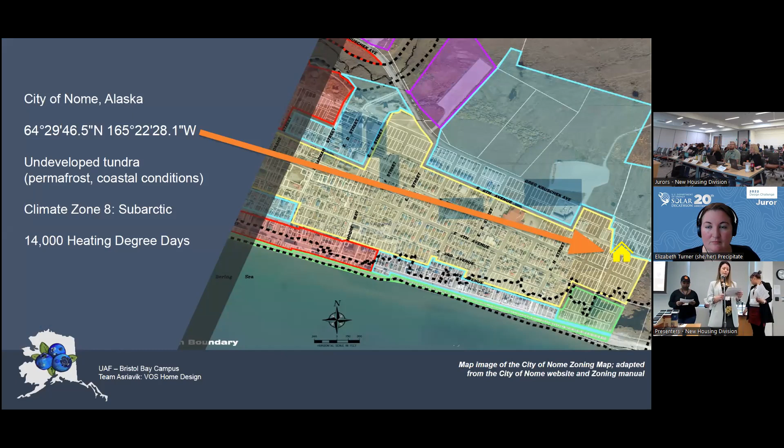Our home must last for generations, so it's designed to be resilient throughout a changing climate. Our goals are to make this home multi-generational, energy efficient, emergency secure, and replicable. These 4 goals guided us through our design process and helped us address all contest components of this decathlon, which are interwoven throughout our design and in this presentation.

Multi-generational living is addressed with a universal building design that considers family members from birth to elder, and incorporates design modifications with accessibility in mind.

The VOS home is a 2-story structure with a single slope roof, which uses a hybrid construction of 4 40-foot shipping containers and traditional timber, built to withstand extreme temperatures, up to 75 miles per hour high winds, and heavy snowfall. We incorporated creative solutions made specifically for our target market and a subsistence lifestyle, such as unconditioned spaces for food storage and game processing.

Our design is tied to a culture of people, not one specific family. We are considering the comfort of the client beyond structural integrity. Customization and cultural empathy can often be neglected in traditional building design, making homes a cost detriment due to their inability to be habitable long-term.

Air quality in the home is addressed with a comprehensive HVAC system that combines two modern mini-split heat pumps and a heat recovery ventilator, or HRV. This system warms and conditions the inside home air and ensures that fresh air is constantly circulated back into the home. Additionally, the HRV system also removes pollutants from the air and recovers heat loss during the ventilation process. Air is expelled from the home through bathroom and kitchen vents, which also controls moisture levels in these damper areas.

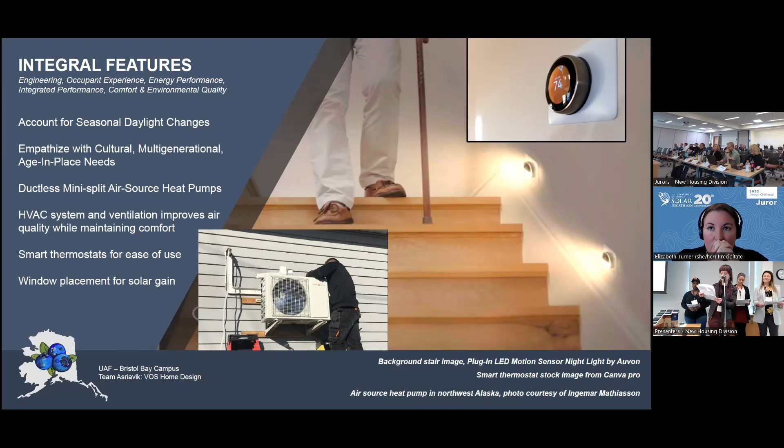Integrative passive design strategies work to minimize heating needs with optimized renewable energy systems to address occupant load profiles. Innovative lighting technologies and window placement will maximize solar gains, while timers and occupancy sensors help to mimic daylight in darker winter months.

Energy costs in rural Alaska create financial hardship and design constraints. Reducing demand through efficiency measures and utilizing solar PV minimizes the operational costs. An average home in Nome can cost between $1,400 and $1,800 in electricity per year, adding heating fuel from $300 to $500 per month, depending on the season. Our design projects a yearly energy cost of just $240, which eliminates the heating fuel altogether.

We used Ekotrope software to model our design. Before adding renewables, our HERS rating was 17, and after adding a solar array, it dropped down to -3. Components that contribute to our better than net zero rating include extreme insulation, triple pane windows, programmable thermostats, building orientation, smart outlets, minimal plug loads, and our 15 kW solar and battery system.

Modeling energy performance, we found we had to create many custom components for things like the special envelope construction, high performance windows, heat pumps, and a heat pump water heater.

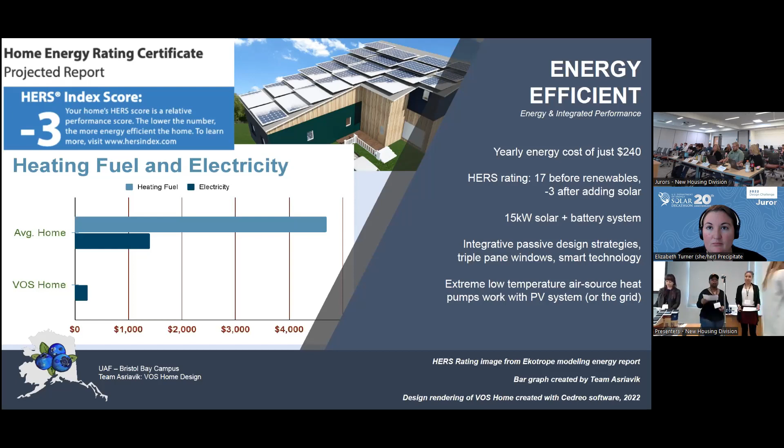Withstanding the climate crisis is imperative to encompassing a multi-generational building lifespan. Alaska's extreme weather changes are being monitored and include rising sea levels due to glacial shed, heat fluctuations, and abnormal amounts of snow. To ensure the home's longevity, the design incorporates a post and beam foundation to allow for moving of the home in the event of flooding.

A tight building envelope allows for heat retention and a stable indoor temperature regardless of access to electricity or heating sources. Additional emergency conscious design considerations include north-south facing egress windows, a hidden first story safe room accessible through the master bedroom closet, and an emergency fire exit with a drop-down ladder on the second floor.

Backup power sources are essential due to the frequency of power outages during winter months, which is why we have a backup battery system to power essential loads, as well as a small wood stove for emergency heat.

The VOS home serves as a guiding framework for other cold climate locations. The ability to modify and customize a building design, decrease the embodied environmental impact, and move toward the future of renewable energy can be achieved in an effective manner. Engineering details of this replicable design are specific to our region.

This begins with the bottom of the house elevated above a gravel pad using geotextile fabric to address area permafrost. The home will utilize an efficient heating system, high performance envelope with R61 walls, and WaterSense plumbing throughout to save water. While our target market is based on our potential client, the Village of Solomon, issues like a lack of affordable housing and overcrowding are found in many other regions.

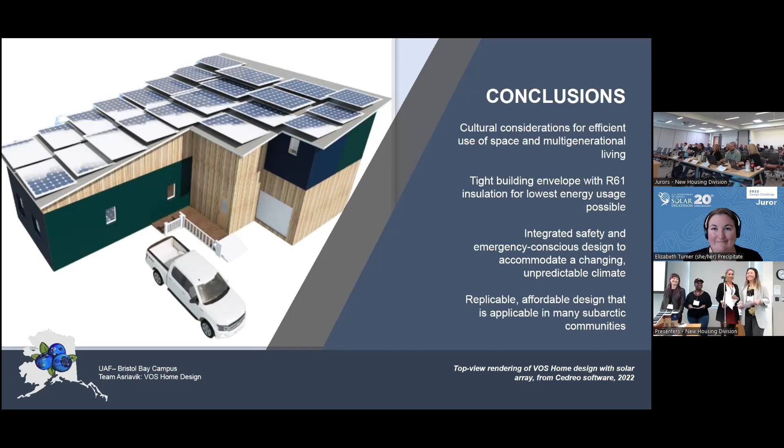And, oh, sorry, just kidding.

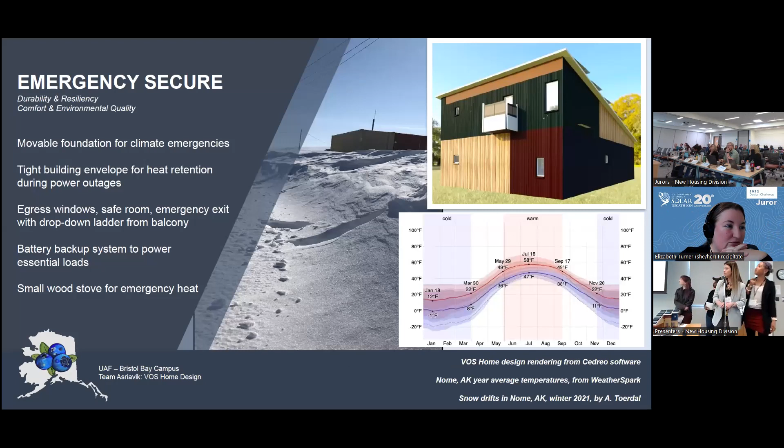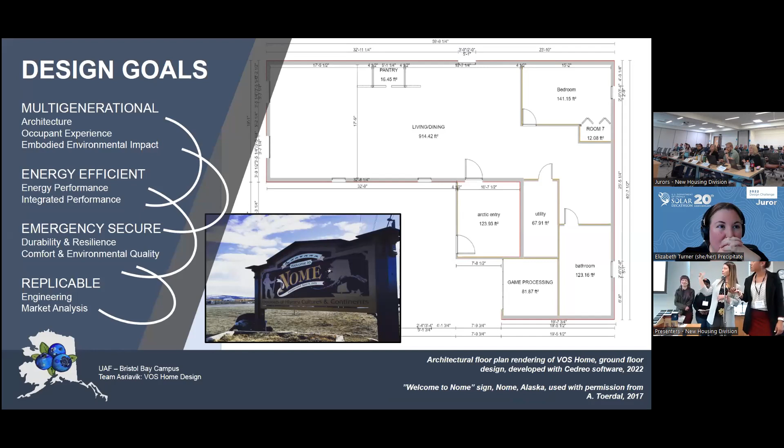We have the two 40-foot shipping containers on the lower floor, and they're high cubes, so they're a little taller than standard 8-foot shipping containers. Although the rendering shows them set next to each other, we're actually going to be cutting out the center sections and welding them together. The vertical trusses on the outside of the home will support the entire structure, in addition to the steel, which is pretty supportive of the home.

So just welding them together, you don't need additional steel reinforcement? That's a great question, I'm curious, I don't have an answer. I don't believe we will, but I think maybe we might have to add a little above to carry some load - that's a question for a welder. One thing to consider is instead of carrying the load all the way across that 40-foot length, you could turn it 90 degrees perpendicular and carry it across the internal insulation wall so you didn't have that large span. That can get really expensive, but there are different ways of dealing with it in your configuration. Also, since you have a roof above it, it's not serving as a roof, so you could just use it for the walls and get rid of the roof. I think you have a lot of flexibility and things to consider there.

So I'm curious, how do you integrate a window in the wall?

With a really, really thick windowsill. Our windows are on the outside of the home, so the windowsills are really thick. They tested putting them a little back before, and it's bad because it just fills up with snow, so that'll be added. It's on the exterior. We also want to note, since you commented about the windowsills, we made them deep because of storage - people can use them for pickling, and that's additional cold storage, which is good for winter.

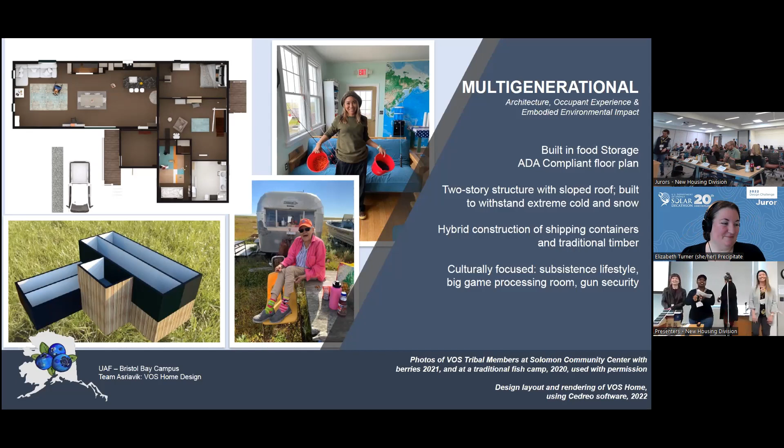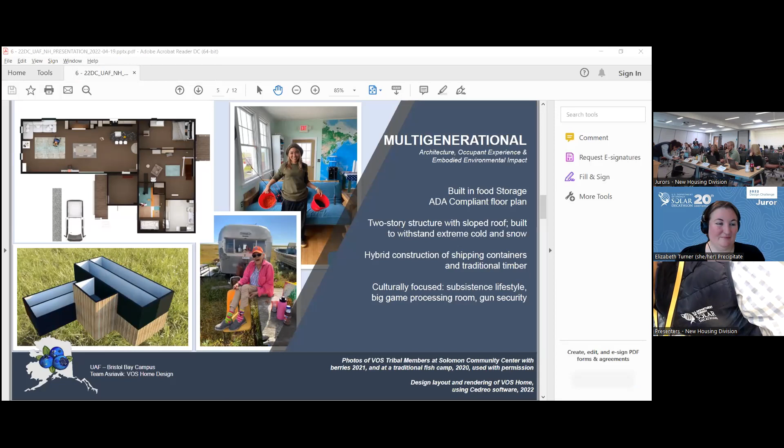Wanted to say the artist is, I believe, Yvette Reyes, who drew our team picture. It's just fun - we hadn't come together before this, so we had to get an artist. We all did it remotely. And she is an Indigenous artist, and that was very important for us to support an Indigenous artist through this as well. That's super cool.

Howdy, Ferris State. We gotta wait 5 minutes to allow y'all to start. I know, it's gonna drive you crazy. Do some jumping jacks, or tell us, do you have an energy related joke? That's what we need. Unfortunately not. You have a water fowl joke? No, I don't. Why did the solar panel forget to take out the trash? Because he has no energy at night. Elizabeth liked it - that was great. I feel that one very deeply.

Y'all have any fun plans while you're out in Colorado? I think we're gonna go downtown Golden. Go to Woody's, hit the pizza buffet - my alma mater, it's really good, write that down. Do not go to Coors. Try to make it up to Red Rocks - that's what I've been encouraging people, it's definitely worth seeing if you can get up there. But Woody's, yes, be prepared, they have really good Bloody Marys. Gotta come back next year.

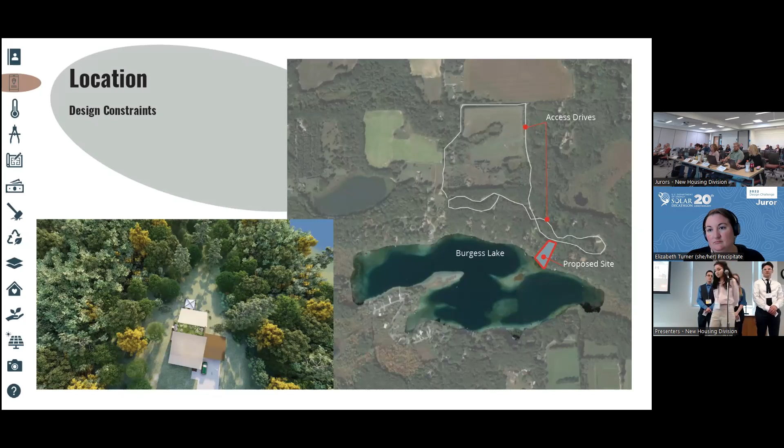Montcalm County is defined by the IECC 2015 Climate Zone 5, subtype A. Greenville, Michigan has a primarily cold climate similar to that of Denmark, which was the inspiration for our concept, Hygge.

Hygge is the Danish concept that refers to finding comfort in the simple things of life, such as a cozy atmosphere and spending time with loved ones.

Due to the nature of our project and the Danish heritage found within Greenville, Michigan, our project encapsulates the concept of Hygge. The Livsstil house encapsulates surroundings, suburbia, and society, and the existing site encourages outdoor activity and a respect for nature.

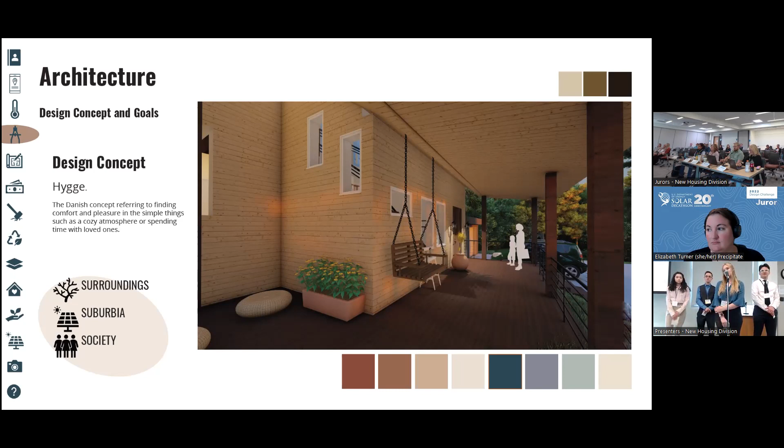We chose a suburban site for a new housing development, hoping to show how the boundaries of sustainable design can be stretched and inspire a shift in residential design thinking. The Livsstil home responds to social sustainability through the incorporation of Danish culture.

When designing the building systems and thermal envelope for the Livsstil house, we made sure to accommodate the context that the building would be placed within, as well as our goals for the experiences we wanted to bring to life within the design.

Our target occupants are the average upper middle class family found in Greenville, with 2 parents and 3 children, and an average income of approximately $85,000 per year.

After a down payment of $50,000, a 30-year mortgage will be established at 5.35% interest, which will bring the total mortgage to $449,437.

The monthly house payments, which will account for property tax and home insurance, will come out to $1,930.66, which is within reasonable amounts for our target occupants and will be further offset by the reduction of and elimination of energy and utility bills.

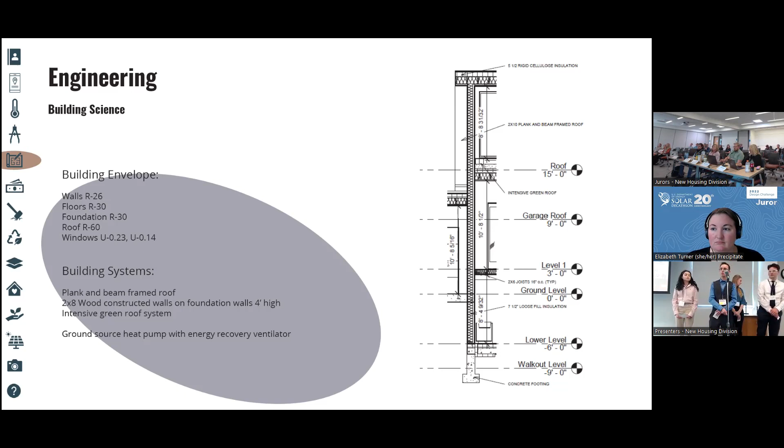The cold winds and heavy precipitation in Michigan require that the exterior and interior materials are designed to be durable and long lasting.

We determined that the Livsstil house would be designed to last for 100 years. In doing this, we had to ensure that the materials were, A, environmentally friendly with a low environmental impact, and B, durable and resilient.

Our team chose materials that were produced sustainably with the location, material source, and distribution centers in mind. The location of the home site in the city of Greenville offers a wide variety of choices in terms of materials and resources.

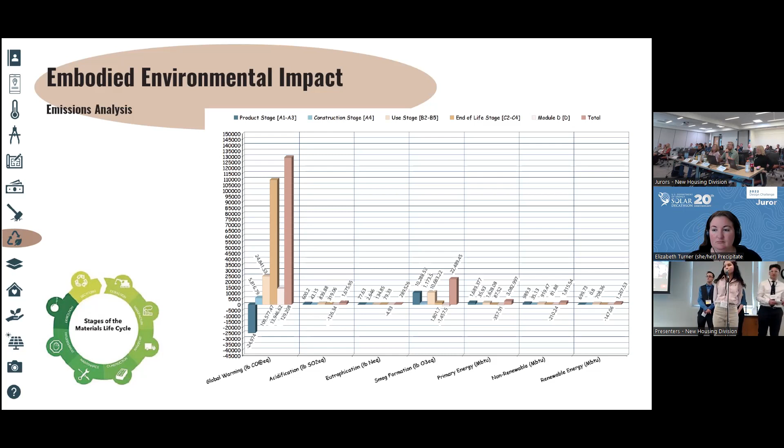The use of local and sustainable materials will be used to introduce the design to the community through the use of local labor. In addition to embodied energy, several other measures of environmental impact must be measured, including global warming potential, acidification, eutrophication, and smog formation.

An effective envelope helps lighten the loads of the HVAC system, and the building form allows the HVAC and ductwork systems to function properly throughout the home. The slope and orientation of the site have an impact on building performance in terms of passive strategies.

Glazing allows for direct solar heat gain to warm the spaces in the cool winter months, while triple glazing and roof overhangs help prevent excessive heat gain and heat loss. The roof orientation allows for the placement of photovoltaic solar panels, and a rainwater collection system purifies and circulates water back into the home's plumbing system.

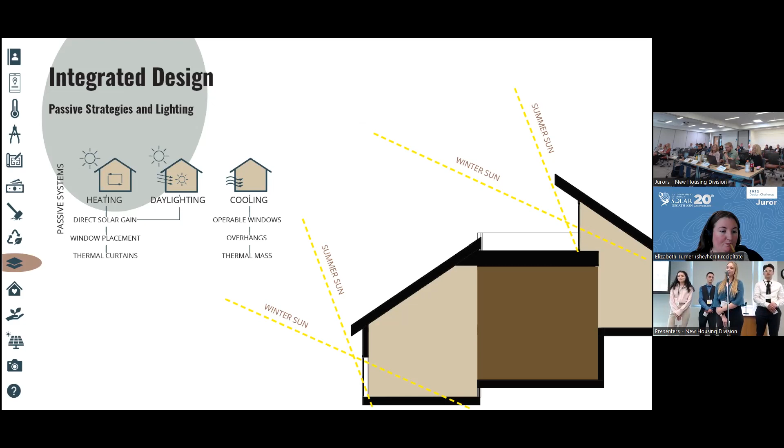The Livsstil home was designed for a single-family household to bring them closer together. The first level is an open concept design to promote conversation within the family and their guests. Sometimes comfort comes from being alone though, so there are areas throughout the home to provide just that to the individual.

A smart home system is embedded into the infrastructure. This design ensures that every other system works efficiently, saves money, and provides safety to the family.

All appliances are going to be electronic, stainless steel, have an Energy Star rating, and manufactured by LG for optimal connectivity throughout the home.

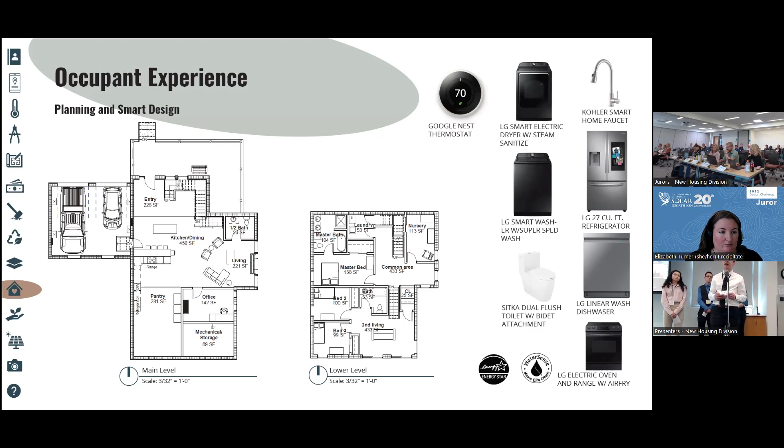The HVAC system, a ground source heat pump with energy recovery ventilator, was selected with occupants' comfort and system efficiency in mind. This utilizes a vertical closed loop system in order to maintain the existing trees on the site. Mechanical selections and load calculations were performed by our HVAC student partner.

Using passive design strategies as well as efficient selections for the thermal envelope, appliances, and internal fixtures allowed us to create a house that is more efficient than the average residential project in the United States, achieving a HERS score of 38 without renewable energy.

With help from our design partners, Michigan Solar Solutions, we were able to develop a solar array capable of supporting the energy needs of the house, as well as providing energy to power an electric vehicle. With the incorporation of renewable energy into our project, we were able to achieve a HERS rating of -9.

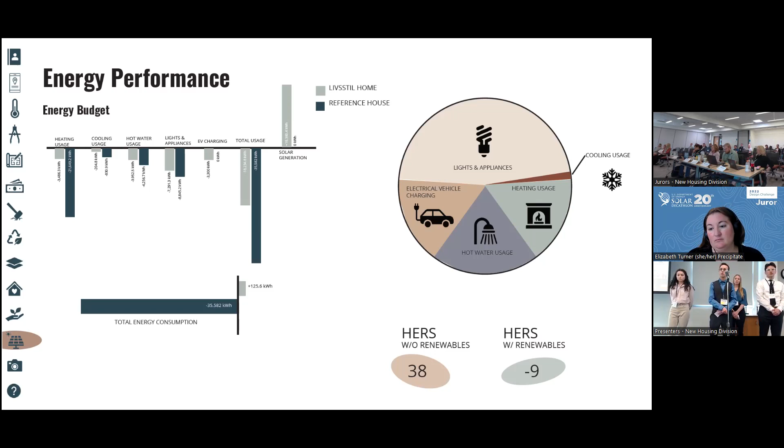By calculating the estimated cost of electricity for the area based on the needs of our project, we determined that the occupants will be saving $389.91 per month, which will account for the cost of purchase and installation of the solar grid in just under 3 years.

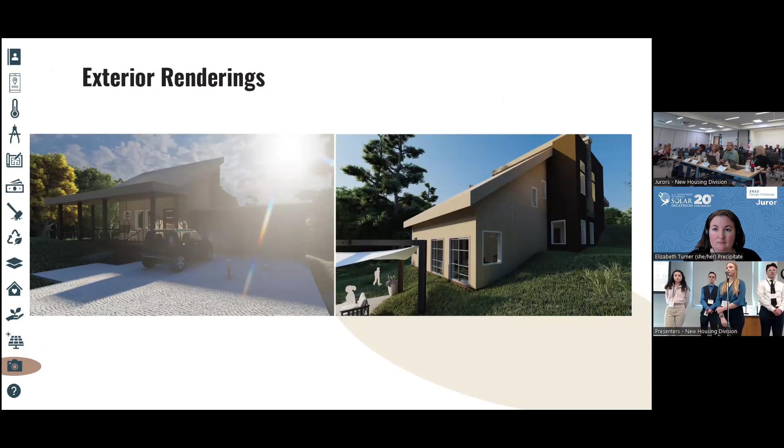The Livsstil home utilizes the slope and an open concept floor plan to create a dynamic and functional design. The 3D form was topped with a large gable roof that resembles those of Danish architecture. This roof structure was subtracted from to create the 2 large shed roofs with a green roof in between.

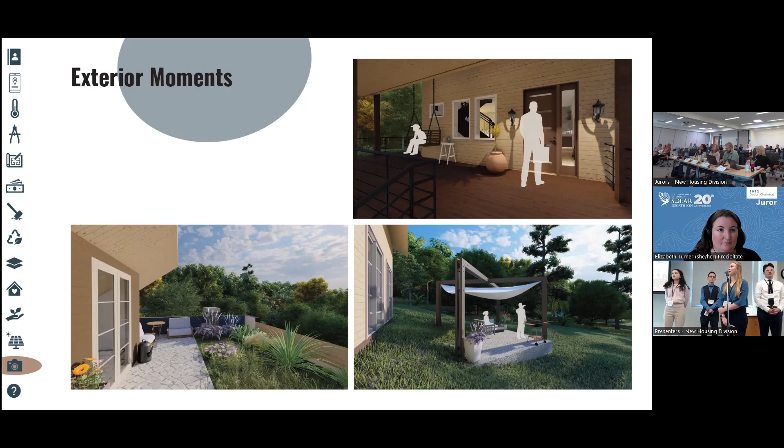We included outdoor experiences to encourage an interaction with the site, and the exterior colors allowed the building to become a backdrop for the site and the blue of the lake. The Scandinavian color palette creates a contemporary, soft and cozy atmosphere within the home, and the wood and warm neutrals blend with the site and the incorporated greenery.

In learning from hygge, we can create a future where sustainable living is not only ideal, but standard practice.

That was perfect. Cut you off there, yeah, that was perfect. Great, let's have a round of applause for our team.

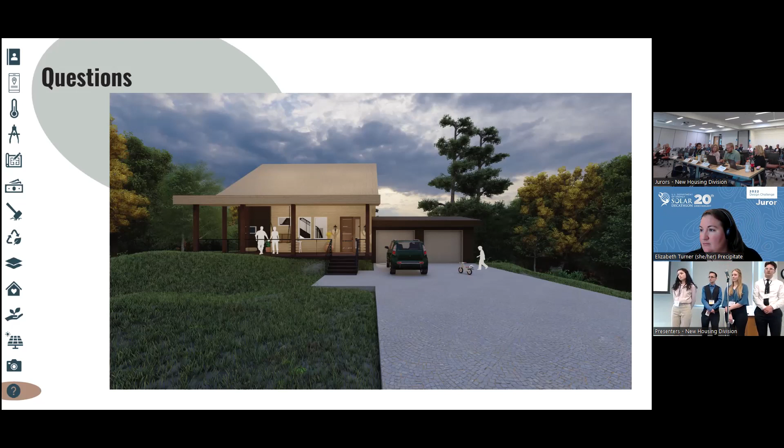The other question I had, if you go back one slide, lower right, what type of doors are those? Are they sliders? Yeah, they're sliding patio doors. The grid pattern on them made them look like they could possibly be garage doors, and while that is modern and I'm seeing it a lot in homes, they're very uncomfortable, very difficult to air seal, and they will kill energy consumption in a home, so I was just curious. Thank you. The doors we selected are from Endure, they're patio doors, and they are fiberglass insulated glass doors.

So I love the porch, by the way, I'm a big porch person, so I'm glad you added that. But I did have, you had a statement in the submission that said wrapped to correct tightness to achieve ACH3. Do you have any detail around that you could share? We don't have specific details, but we designed the building and envelope to meet Michigan code requirements, which are an ACH of 3. Okay, yeah, just in general it's hard, it's not necessarily easy to do. The integration of the components together is so critical to make sure you're not getting air leakage, so it's good to see the details around how you're going to achieve the air tightness, because you can do air sealing from the exterior and interior, or some blend of both to achieve that. Trust me, builders are trying to do it all over the country, and it's not as easy as it seems.

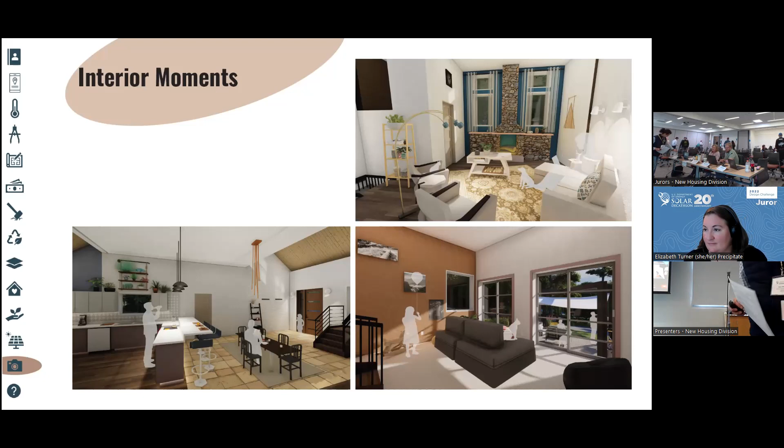Okay, I believe now we have a break scheduled, up until we'll meet back here at 35 minutes after the hour, for our University of Victoria, British Columbia team. The next two are online. No, they're on site. Okay. Yeah, wow, great. And then we got 2 online after that, I think it's Australia and... yeah. I am, I just don't want people seeing me eat. Oh no, you're dark, fine, screen.

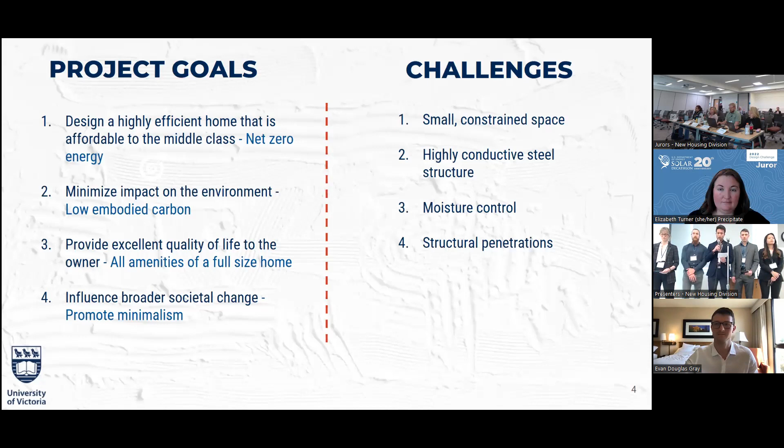We have south-facing fenestration with overhangs to help optimize seasonal exposure to sunlight. The roof pitch was designed to be 36 degrees, the optimum angle for PV generation at the site location in Victoria. We also included a simple rainwater collection system to provide purified drinking water, with a storage tank located in the roof.

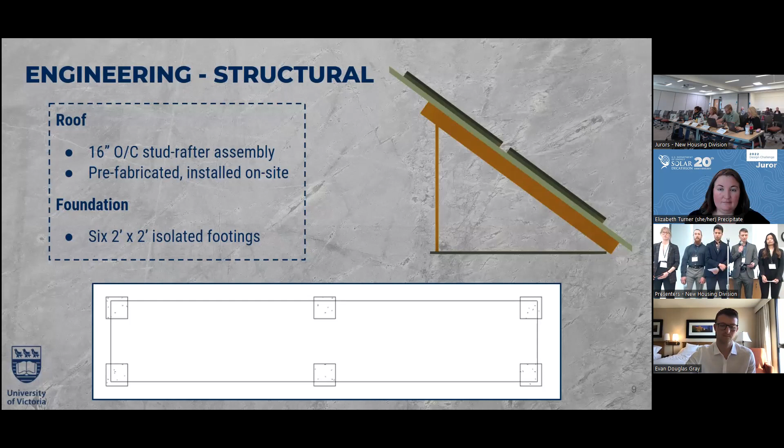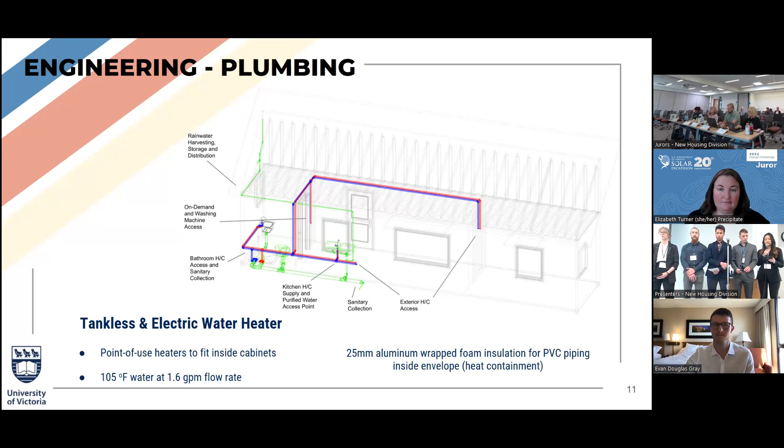Next slide, here you are looking at the plumbing layout. The piping design would minimize maintenance needs and heat loss. Along the pipes, we decided to install tankless electric water heaters due to their efficiency and the space constraints.

As I mentioned earlier, our project is built out of a repurposed shipping container. The corten steel material withstands extreme weather and is incredibly durable. To ensure optimal temperature within the unit at all times, a heat pump is paired with a passive heating design. To improve resilience, a rainwater collection system was added and is purified on site.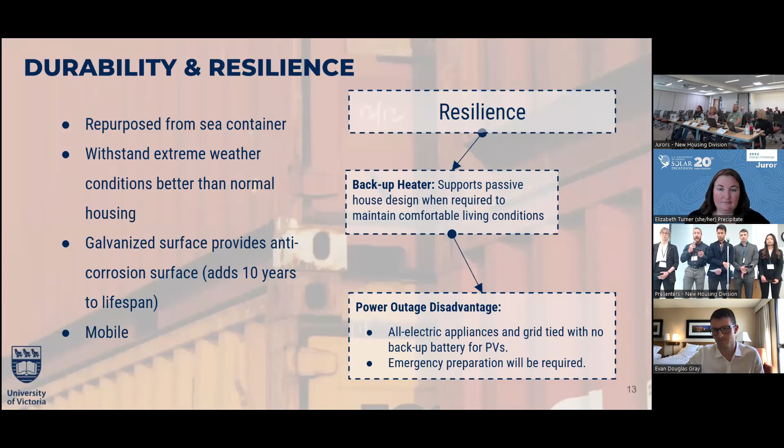A life cycle assessment was done using Tally. The most important point we can see here is the global warming potential of 5,085 kilograms of CO2 equivalent. The embodied carbon was around 170 kilograms of CO2 equivalent per meter squared, which is 24 kilograms of CO2 equivalent per meter squared less than the average passive house Part 9 building.

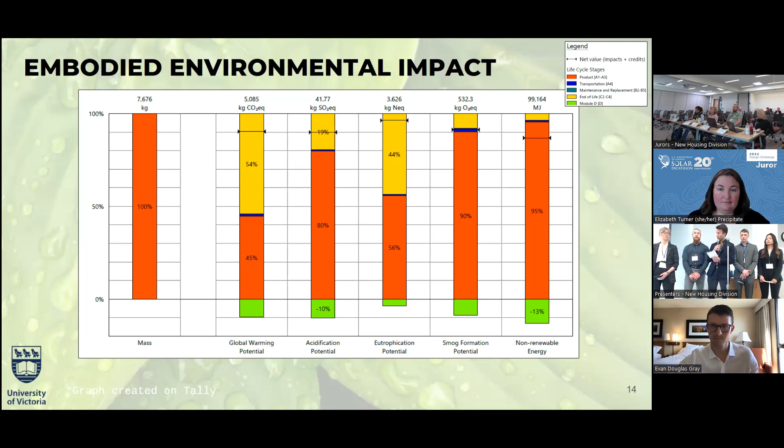Most of our carbon emissions came from production and end of life cycle. Transportation was kept at a minimum by using locally sourced material, and the green bar there indicates that 10% of our building can be reused and recycled.

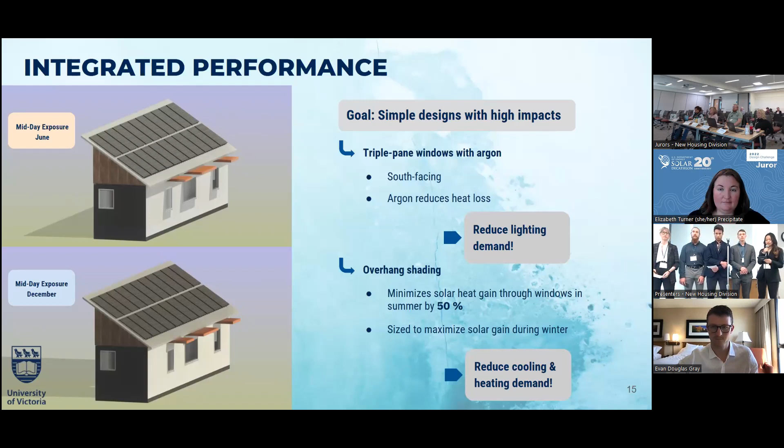Now I discuss how we use simple architectural designs to increase our energy performance. As you can see, we added windows on the south side of the building for daytime lighting. For the material, we used triple pane glass filled with argon for increased insulation. On top of that, we added overhangs sized to optimize solar heat gain during winter months and shading during summer months.

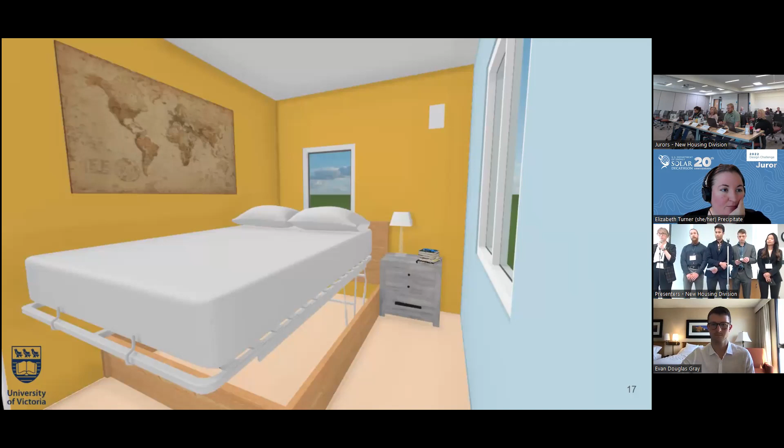For comfort and environmental quality, we used low odor adhesive that's safe for indoor use for the walls. We ensured indoor air quality and particulate control with a comprehensive ventilation system in the unit. We also provided the occupant with a robust temperature control system, as well as a full suite of home amenities.

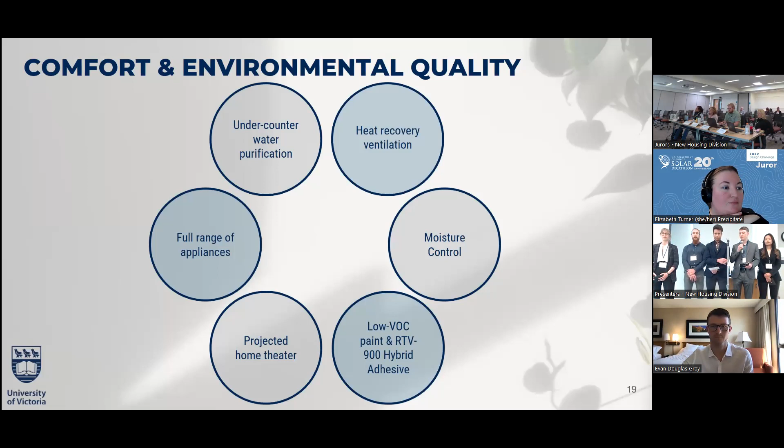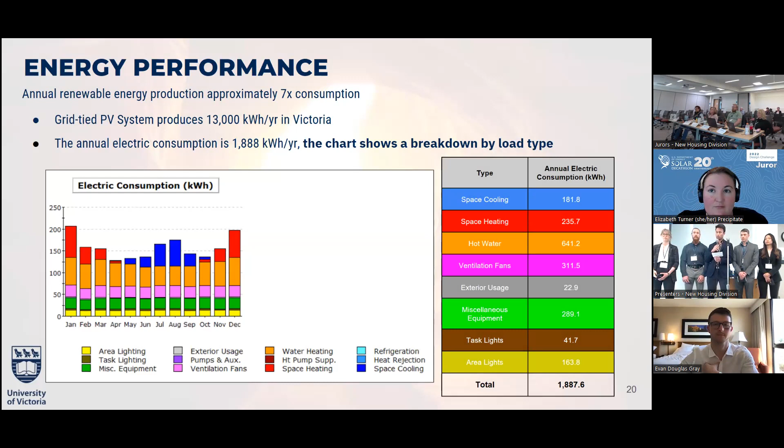For the energy analysis, the CCAN's grid-tied PV produced 13,000 kilowatt hours annually, which is 7 times the consumption. The chart is broken down based on load type, and hot water was the main contributor to the electric consumption. An important thing to note is the mechanical energy use intensity, which includes all the loads except lighting and miscellaneous loads, found to be 46.2 kilowatt hours per meter squared. This meets passive house levels of performance by the 2018 BC Building Code. Thank you very much for your attention, and welcome your questions.

My question is, are you a power producer first and a home second, or a home first and a power producer second? For sure, for sure, of course.

When we were starting out with our design, a really big concern was that we weren't going to be able to have enough insulation to have a low heating need. So we made it super energy efficient. And then we kind of ended up being like, maybe we didn't need to make it that energy efficient, you know what I mean? Or we could have had less solar panels. We kind of didn't get those numbers until the very end, and then we're like, wow, that's probably way more than we need. But what's wrong with generating more power, I guess, right?

It definitely is a lot more power than we use, up to 7 times. But the planning and design considerations were geared towards generation of funding from the net metering program within our hydro system. Each kilowatt hour in excess over a year period is sold back to the local utility grid at, in ours, 11 cents per kilowatt hour. So over a year it's roughly around 1,000, depending on the degradation of the panels, as Connor mentioned. The nice thing is it definitely subsidizes the initial costs of the unit, and gives the occupant freedom of energy use, because they know they're not going to be paying for any of it, just eating into their profits on a yearly basis.

One thing to think about is if you did a thermal model and looked at where the heat loss was happening, there's probably not a lot of benefit to having anything inside the little bump outs, because you're going to lose heat from where it bumps in, right? Does that make sense? I wish I could draw this. You mean the corrugation, of the container? Yeah, the corrugation. So I think you'd be fine just having, I don't think you're gaining a lot for the cost of putting insulation in there. But you could, if you were spraying on the mycelium and let it grow, it could end up being kind of like this curvy interior wall surface

that you drywall in front of. So I really like that idea. And I think the insulation design was something we did earlier on, and now that we've had our whole energy analysis results, which is very near the end of the project, we could rethink the insulation concept and maybe not go for such high R value or air tightness, and bump that down. I think that could be a small change. I'm really big on eating your vegetables first, doing the insulation and the air sealing, so don't back off on that part.

Why 2 HRVs and 2 hot water heaters for 320 square feet?

So for the HRVs, we decided they were 2 ductless HRVs. They were quite small, so we put one in the bedroom and one in the living area, just to have ventilation to get the required CFM for the space, since they were quite small.

We were looking at different options for hot water. First of all, we only have electricity for utility, and for storage we're very limited on space. So we decided to use point of use water heaters, because the water comes on demand, and the expected use from this unit is only 1 bathroom and a dishwasher, so not very much use in terms of hot water. We decided it was the efficient way for this design. The idea of having 2 was one for the bathroom and one for the kitchen, but I think we probably could have just used one as well. Would have been fine.

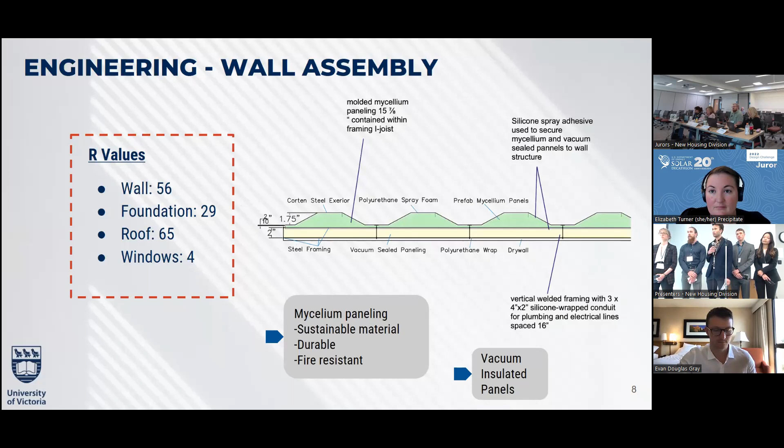And I think the one question I have, looking at your layout and floor plan, do you have any concerns about the entry coming basically into the kitchen? I know how clean I keep my space, and in a small space like this, any sort of clutter is going to be really prominent. So having that entry right into a main spot could be fairly messy if you're having people over, unless you do your dishes. Just curious what you thought about that - did you think about other layouts, other designs?

So when I was looking at the floor plan, my main thing was I wanted to have the bathroom and all the plumbing in one area, and then the bedroom aside from that, and I figured the living area would be around there. So when I was looking at where to put the door, I initially had it more central on that wall, but I didn't really want to put it in the middle and waste the space, so I pushed it over to that side. I feel like I could have pushed it over to the other side a bit and had the table beside the living area. But I just wanted it to be on one side so it didn't take up too much room in the rest of the unit.

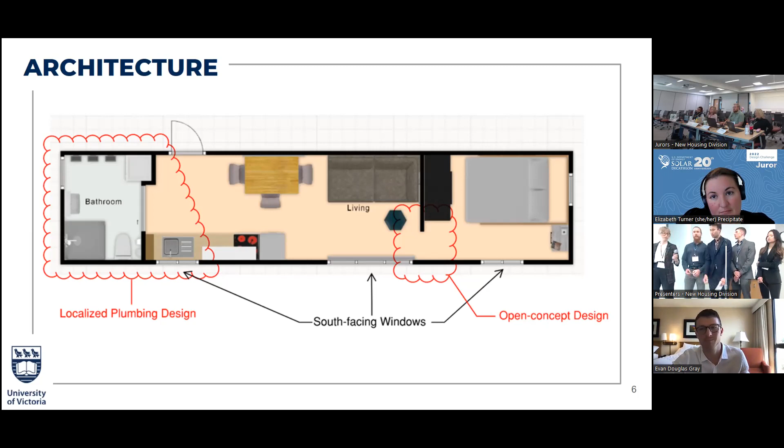Yeah, so you were talking about the heat pump? In that model, that was showing a water collection view. We took off the side paneling so you could see in there. It isn't actually a fully insulated space, because we didn't want to penetrate into the shipping container too much. So that is meant to just be essentially a rainwater collection system to provide drinking water.

And then I believe the heat pump would be mounted up there as well. Okay, now that makes sense. And I think in creating a small portable space, like if it needs to be moved.

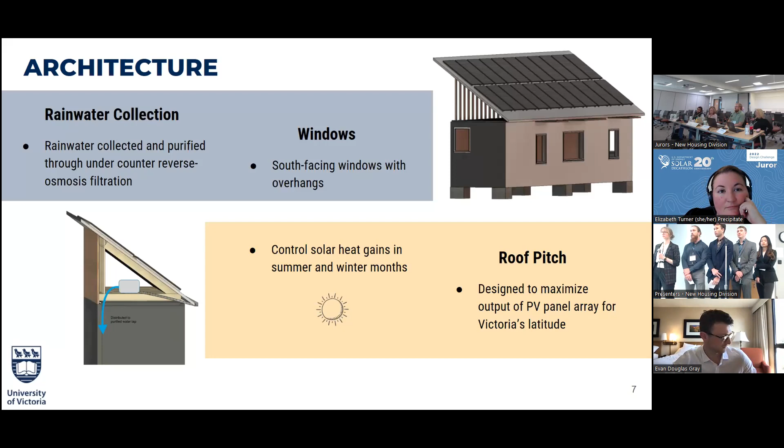I had a question also about your site. Was it just available space? So that was when we first started the project, it looked a lot different. We were going to have a design partner that's making a homeless sheltering community in this space in Victoria, so we were going to work with them. But eventually that didn't really pan out, so we moved to using shipping containers. That's where we got started.

Question time, all right, you can wrap up that final thought. Yeah, so that's where it started, and then we decided to just do our own shipping container, and we just kind of had that site. So we didn't...

Thank you so much. I really commend you guys for doing this as an extracurricular activity. That's awesome. Next year's going to be even better. I hope you have fun. Yeah, we did, great learning experience. Thank you. Good job.

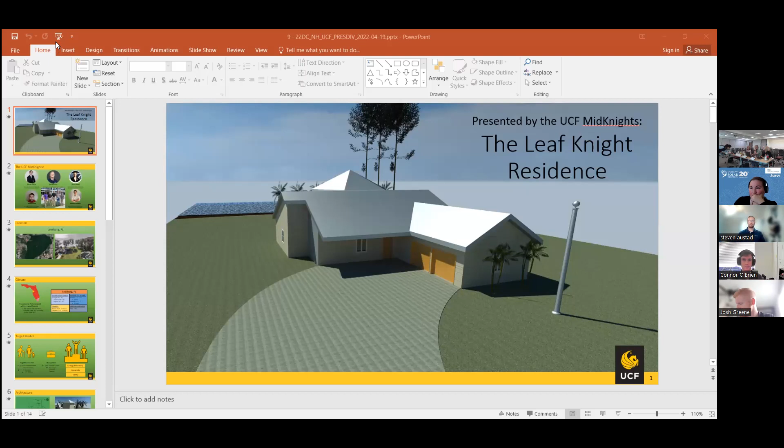Great, thanks. I can't get on the site, what's going on, get kicked out. I sometimes have to shut down Google. These are the only people that need to be hosting the computer. Clear. Well, I'm not on this, I'm just trying to get into the portal again so I can look at what I did. I'm just talking about the portal. We'll try it again, I'll try and Google. Okay, that worked, Google worked. I would have liked popcorn, but you're just fine. I just was seeing who else was in the room.

No, I've seen those states, Michigan and Wisconsin up north. They probably get a lower first score because they're so cold.

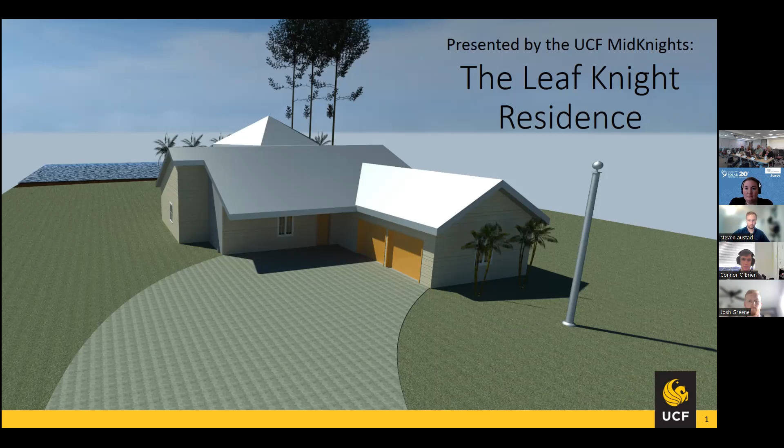Our team, the UCF MidKnights, consists of 5 senior undergraduate mechanical engineering students shown here.

With a population of approximately 24,000 people, Leesburg, Florida will be the Leaf Knight Residence's hometown. Leesburg is well connected to 2 of Florida's bustling hotspots in Orlando and Tampa, and has a charming set of attractions itself, such as Venetian Gardens and the annual Food and Wine Festival. The home will sit by a brook that empties into the nearby Lake Eustis, granting the occupants a quiet and private reprieve from the surrounding lively centers of social activity.

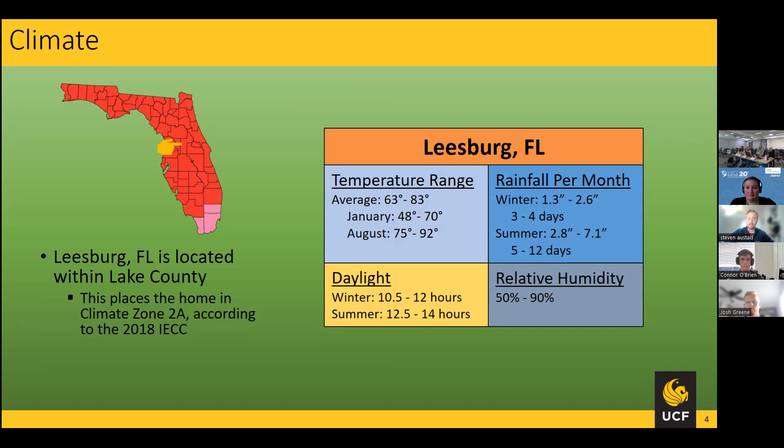Leesburg is located within Florida's Lake County, placing it in climate zone 2A, which is characterized by a hot and humid climate. Florida is one of the best examples of climate zone 2A, as it features long summers and short and mild winters. Temperatures range from 48 to 70 degrees during the coldest months, and from 75 to 92 during the hottest months. Florida is also known as the Sunshine State, which is reflected in the large number of daylight hours throughout the year.

A small family that likes subtropical nature, but still loves suburbia's modern conveniences, was the primary kind of consumer this home was designed for. Ideally, the income earners would have a high education career with an income that can safely finance the home. They would be seeking a home that soundly protects them from Florida's continuous onslaught of sun and storms throughout their lives. Reducing operating costs to maximize day to day comfort is also a big plus to the perceived consumer.

While no specific architectural style was chosen, the Leaf Knight residence was designed with the idea that it would appear hard on the outside, soft on the inside, and strong throughout the structure to make the consumer feel safe and comfortable. The floor plan seeks to maximize light and minimize heat, with the garage placed on the north of the building to minimize sun exposure for an unconditioned area. The bedrooms are on the east and west sides of the building to watch the sunrise and sunset, and the south is filled with windows to let light illuminate the common areas, easing heating loads in the winter.

The hot and humid climate of Central Florida can often lead to reduced efficiencies in the home's mechanical systems. To remedy this, we use systems that work with, instead of against, the climate. To create a comfortable environment within the home, a variable speed heat pump unit was chosen for the home's HVAC system. These units are ideal for climates like that of Central Florida, as they feature exceptional humidity control and energy efficiency by running at a reduced speed for a longer period of time. In addition, mindful placement of the compressor can further improve energy efficiency. We accomplished this by positioning the unit where it would be shaded during the hottest parts of the day.

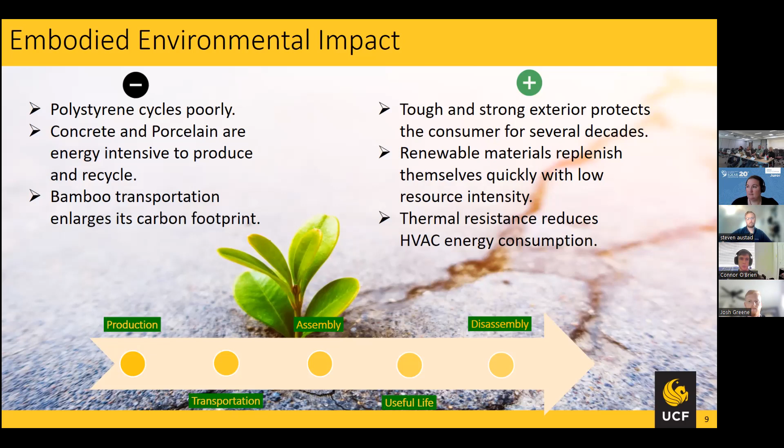One of the goals of this home was to deliver premium comfort as efficiently as possible. Passive systems, such as the Google Nest Smart Thermostat, improve the occupant experience by creating a more comfortable environment within the home. By viewing the home as a whole, we were able to make strategic decisions that would improve the occupant's living experience.

We started by selecting a lot with southern exposure, which provided the home with the ideal orientation for roof-mounted solar panels. The back of the home features a hexagonal shape with a vaulted ceiling, which accentuates natural lighting throughout the day and provides opportunities for cross ventilation and for hot air to rise via the stack effect.

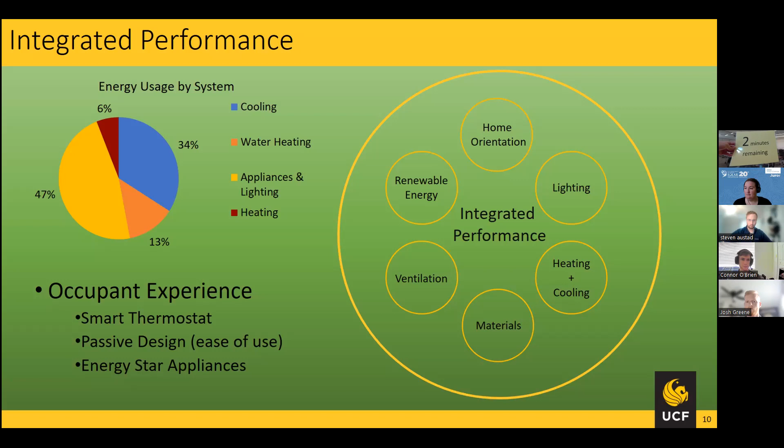Thanks, Connor. Hey everyone, I'll be going over the comfort and environmental quality of our home, in which we took extra measures to cater to.

For our HVAC system, we chose a system that can work in conjunction with a Google Nest thermostat, as well as HEPA air filtration. Additionally, our 50-gallon hybrid water heater includes 3 different modes to satisfy the occupant's needs.

The ventilation of our home features an energy recovery ventilator, a dehumidifier, and many operable windows that allow for cross ventilation when opened, like Connor mentioned.

Lastly, to further reduce the noise in our home, we chose to incorporate sound deadening materials into the interior walls and floors, helping maintain an even quieter living space.

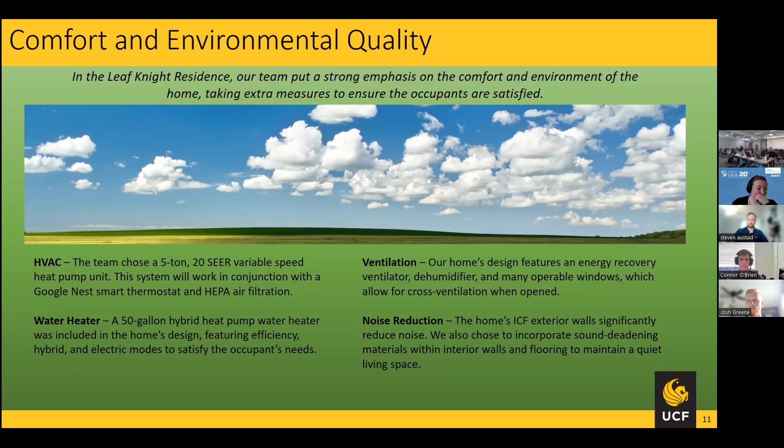The grid can produce a yearly output of around 12,660 kilowatt-hours, which more than covers our household yearly needs, as well as accomplishes our goal of contributing to the power grid.

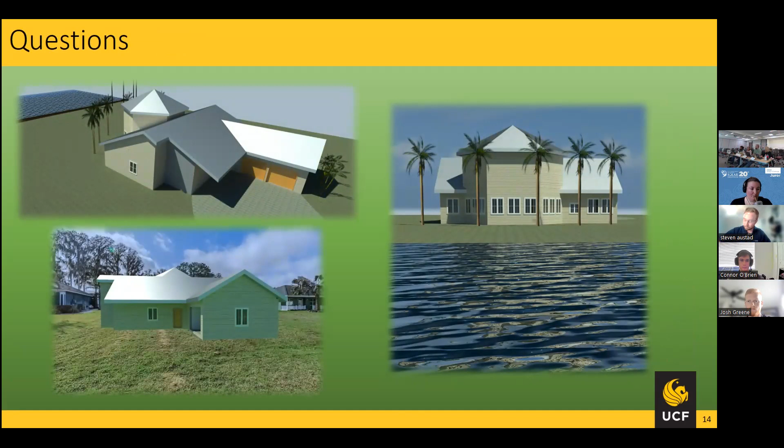Yeah, I had a few questions about your HVAC system. Could we go back to that slide that showed your, it's like the second or third slide.

Can you walk me through sizing, location, and your thoughts on implementing this? Sure. We chose a 5-ton system since our home is 2,170 square feet. We also went with a 20 SEER unit for better efficiency. We sought to place the condenser on the east side of the building, but that was too far from the air handler, so we put it on the west side, which is not as ideal. We were going to either put a tree or a small wall to shade that unit and make sure it's operating at peak efficiency.

Okay, I just wanted to make sure—I couldn't quite tell from your plan set, is that air handler out in the garage? Yes, it is. Okay—well, no, sorry, it's a small closet. I think that was a last minute change to our design on Revit. Okay, I just couldn't quite tell. Yeah, having anything in the garage like that is definitely going to be a big no-no for any program compliance. Yeah, we found that out at the very end and were like, oh, we need to make this change.

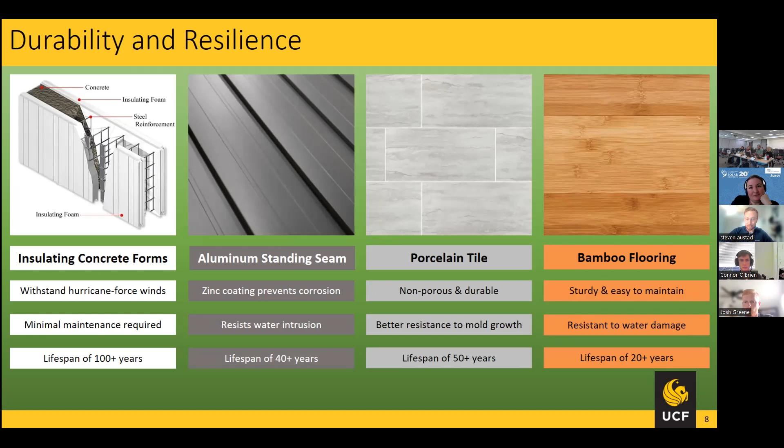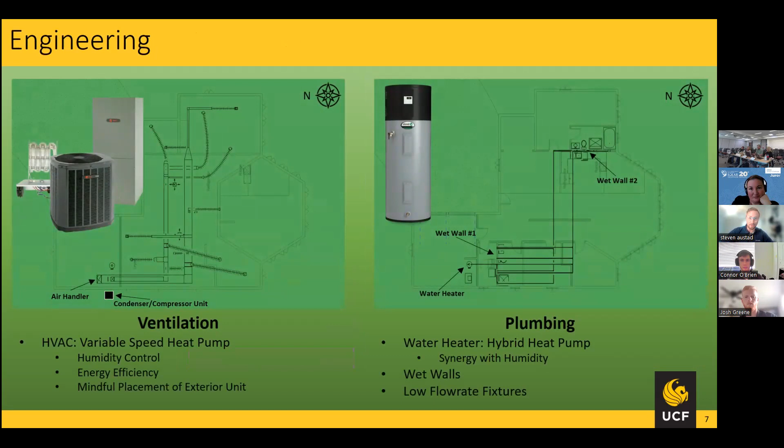I think we actually wanted to incorporate that towards the rear. We didn't think of it mostly as an energy saving space if we were going to include that, because in Florida I don't really think there's a way to get out of the heat if it's not enclosed completely thermally, I should say. But we ran out of time to add a porch, I guess you could say.

Yeah, you mentioned that you'll get solar gain in winter through the windows, but you're also going to get solar gain in summer through those windows, so you have to manage that heat gain. A lanai could provide you shading. You could still have the windows, but it would provide some shading for those. It wouldn't provide any help in winter, of course, but it could improve energy performance in the summer.

Thank you, we'll definitely take that into account. Did you do any climate modeling? This is so close to the lake. Where are you going to be in 50 years?

So I looked at flood risks, and it said there was a mild risk every 30 years or so, or roughly every time a severe hurricane comes in. One of the perks of insulating concrete form walls is they're very good against water intrusion, and a lot of our materials actually are, so ideally the home would be able to resist a flood like that, or at least with minor damage.

As for in 50 years, I'm not sure exactly if the lake will rise. Ideally that's what we're designing this house for, so we don't have to get to that point with the climate. The lake it sits on is part of a larger chain of lakes, and then backs up to a place called the Green Swamp, which is where all the excess water usually drains to, and that is much more southern in relation to the house. We would be at the northern part of the chain of lakes, Lake Eustis being the very top. That's why there's such a low risk of flooding where we are.

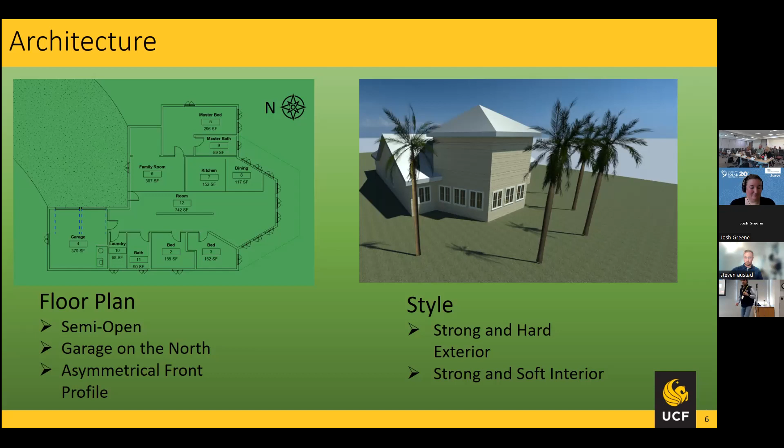Hi, can you hear us? Yes. Yes. Can you hear us? Yep. Yes, we can. Yep.

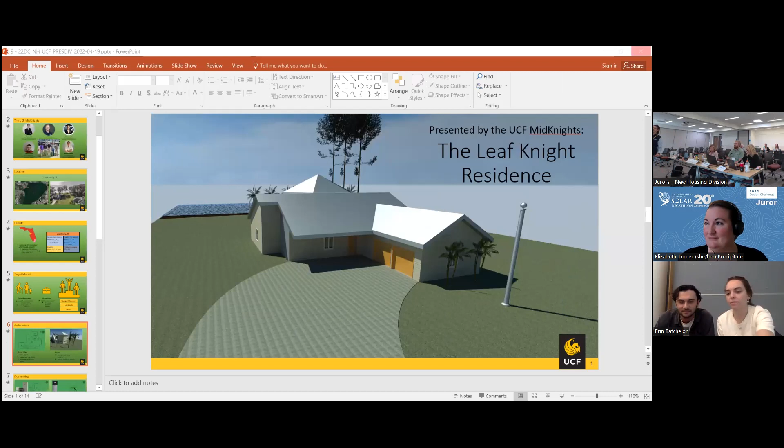Is it just you two joining us today? We have 4 of us here. There's 4 of us. Oh, awesome. Hello, we're all squishing in. Good morning or good evening in Sydney, whatever it is over there. 7 a.m. on a Sunday morning. Good morning. Thank you for joining us. Thank you for joining. Yes.

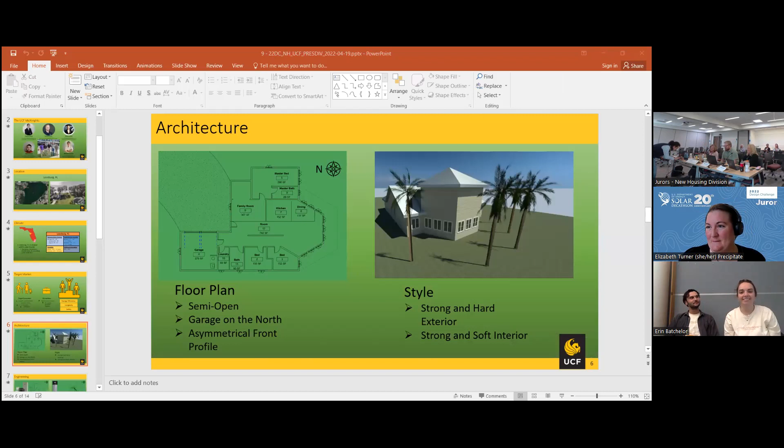Beautiful, I love the shutters. That is so cool. So I'm going to go ahead and try to give y'all control of the slides, or would you rather me advance for you?

I think we would rather be in control, if that's all right. Okay, let me see if I can give that to Erin. Thank you. Yeah.

Annie, would you mind just pressing that every time we need to change? Yeah, I don't know if it'll be able to reach. Maybe Tom, can you control this thing? Yeah, sure, yeah, I guess up to you. So basically, just when it's a new thing, it'll change.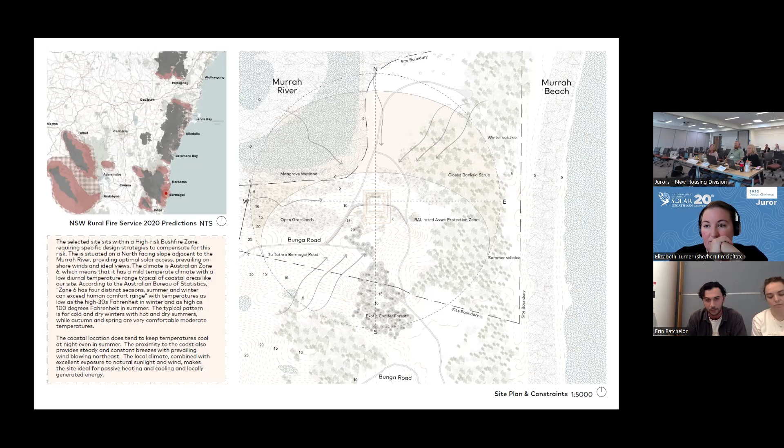Next slide please. Energy, bushfire, and passive heating and cooling independence are critical features. We define independent living to mean off the grid, but to also mean the occupants can control their own environment. 2 residential pavilions are set into the landscape, making minimal disturbance to the land and nature.

The pavilions are divided by 2 retention ponds and a connection bridge covered by a green roof. The volumes can be built at once or staged over time to make the house more affordable upfront.

The house can close up completely in the event of a bushfire. The north facade is the only exposed side of the design, with triple glazed windows that can be sealed using an operable manual folding system made of FC sheeting. This wraparound veranda is an Australian vernacular feature that allows users to completely open the house and enjoy the place around them. Next slide please.

The long section shows the open plan living space, which is typical of Australian homes, but also affords the greatest flexibility to occupants. The steel frame structure is organised on a 1200 by 2400 millimetre grid, the standard size of all sheeting in Australia. We can therefore make use of prefabricated, mass-produced products and reduce material waste.

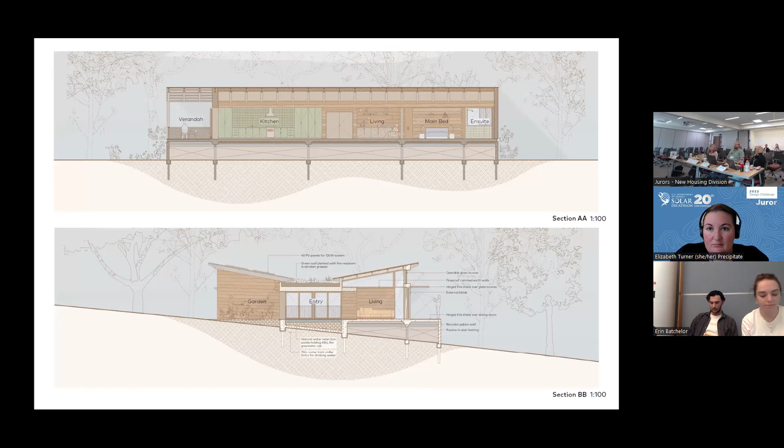Next slide please. The material selection was based primarily on fire resistance, thermal performance, local proximity, and low carbon properties. The exterior is an elegant collage of rammed earth, green coloured corrugated steel and glass, while the interiors include warm plywood ceilings, blue and green tiles, and wooden details.

Next slide. Our approach to materiality was to source recycled and locally sourced materials within a 60-minute radius in order to reduce the project's embodied carbon footprint. We selected rammed earth as a key material for its highly insulative properties, low carbon footprint and fire resistance, sourced from the excavated material on site and combined with clay deposits from the Murrah River.

Spotted gum window frames, a fire-resistant grade timber, are recycled from the nearby Bega timber yard, while all corrugated steel is also recycled from Bega scrap metal recyclers. Slabs and piles are produced from low-carbon reinforced concrete developed by UTS Engineering. All interior materials are free from toxins and chemicals, including non-VOC finishes, carpet and furniture to ensure occupant health and safety, while all appliances are electric, optimizing solar capacity and reducing bushfire hazard.

Our approach to integrated systems and engineering was to employ passive house design techniques to thermally regulate the residence. The building envelope is designed to help insulate and trap heat loads when the operable windows are closed. Earth-coupled slabs reduce heat dissipation in cooler months and capitalize on earth cooling strategies in summer. Operable metal and glass louvers are included above the 2400 millimetre datum line on the north and south envelopes, with smaller operable windows on those parallel, assisting in stack effect and cross ventilation.

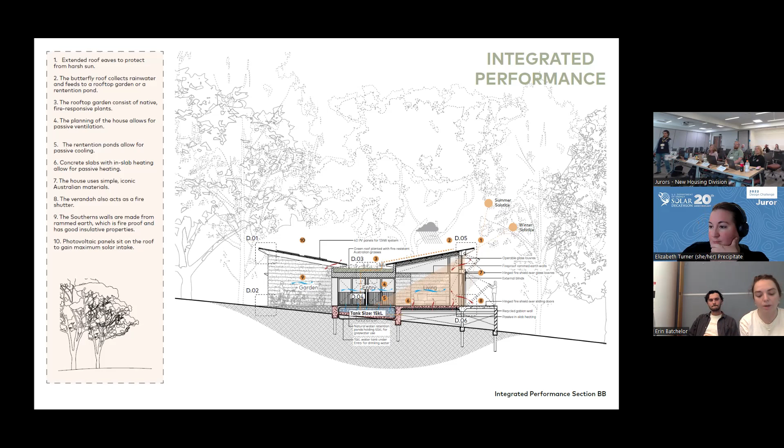The section features 2 skillion roof forms that collect yearly rainfall, draining and filtering it through a native fire-responsive green roof and into retention ponds below. This grey water is then reused for toilets, gardening, and stored for a future bushfire event. This retention pond improves the evaporative cooling properties of the design during summer. The roof on the north-facing volume opens to the sun for maximum passive solar gain, while the roof on the back volume opens to the north to allow for optimal placement of PV panels.

In order to reduce cost, our construction principles focus on simple methods and minimal finishes. Outer envelope walls are designed as sandwich panels containing a layer of rigid insulation made from recycled plastic and fastened together with non-thermally conducting fasteners to reduce thermal bridging. The roof eaves and awning overhangs have been designed to protect the northern glazing from direct summer heat while enabling the winter sun and heat to flood the interior spaces for optimal passive heating.

The spaces are designed to provide maximal function within a minimal footprint. The house uses human-controlled passive systems, allowing occupants to have control over every aspect of indoor comfort, temperature, amount of fresh air and natural light, and degree of openness to the surrounding environment. The ability to control the interior environment, coupled with the tremendous access to natural light and air, will enhance the occupants' health and well-being overall.

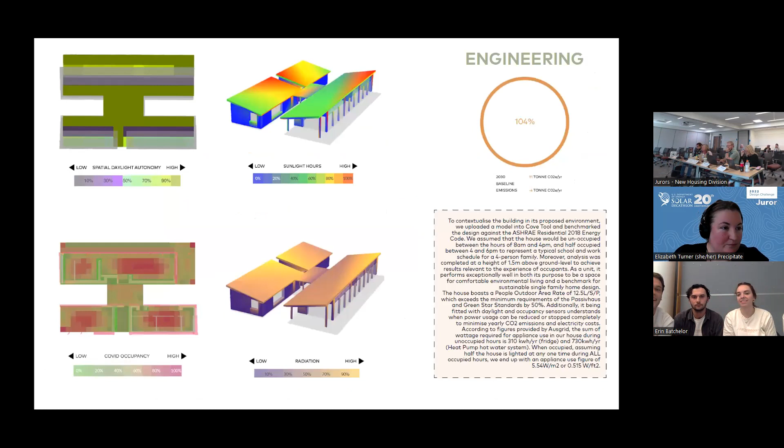I guess I've never been in one, so I don't know how bad these are. In the event of a fire, the house is designed to accommodate for that, so the panels that fold up protect the house to the best of their ability. But based on the site itself, there's not too much that can be burnt around the house, it's just in that bushfire-prone area. If it were placed in a more exposed area where there's more trees and it's more likely to catch, then more provisions could be made for bushfire prevention strategies such as sprinkler systems and gutter guards and other stuff along those lines.

So in the event of a fire, we do believe it would be successful in withstanding something like that to a very significant degree. But any damage is easily replaceable, shown by the low cost materials and the simple structure we've incorporated.

Just tacking on to Tom's answer, we designed in line with the bushfire attack level housing code, so ours is in a BAL-FZ zone, which is the highest level you can be. All gaps when the house is fully closed in the event of a bushfire are no bigger than 2 mils. We have no gutters on our house, which is the most critical point where leaves can gather and embers can catch on really quickly, and that's where the house can catch on fire. We've used non-combustible materials, so I think we would be quite successful if a bushfire was to come through, that the house would survive.

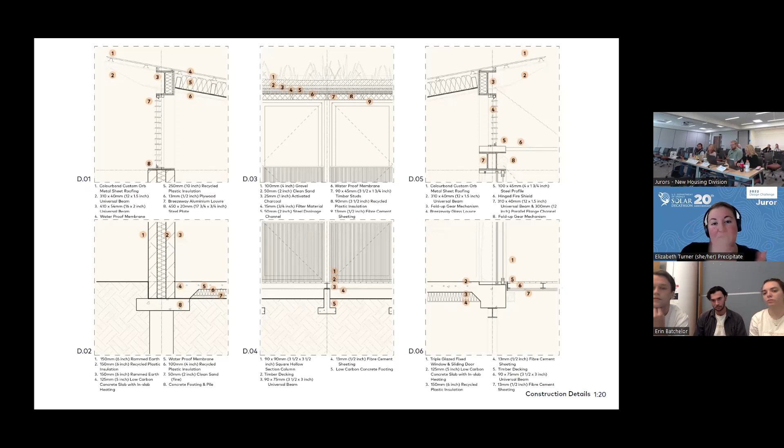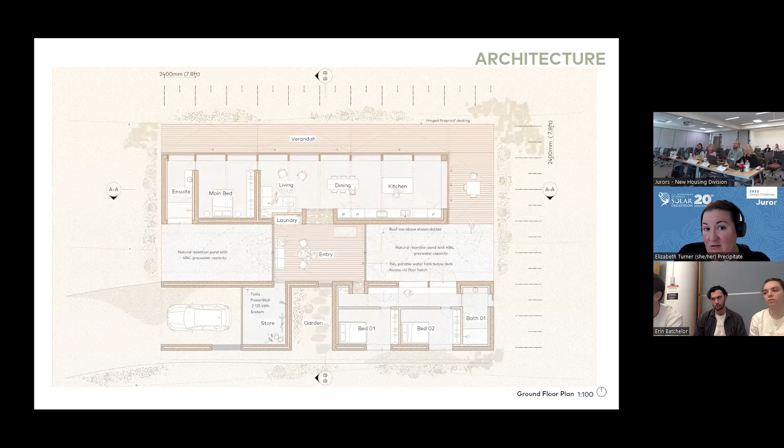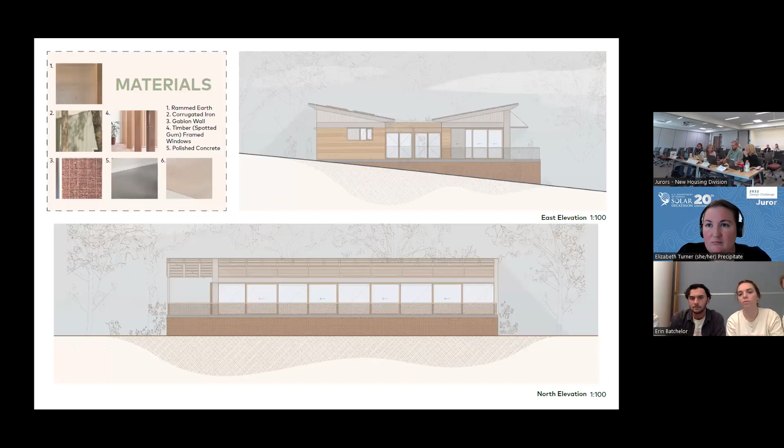So that's saying it needs mechanical heating or cooling, just a very small amount, but still something. I think you gave a temperature range and it actually gets hot, so I'm very interested in how cool it could get, because a lot of people's temperature range is very narrow. I'm curious, if it's 100 degrees outside, how cool can it stay inside? Because you're going to have a cooling load there.

Great question, and I don't know the exact answer to the degree. I think because we're in a very mild, temperate climate, the median summer temperature is 20 degrees Celsius, and optimal human comfort is from 20 to 24 degrees Celsius. So I don't think we'd have extreme weather conditions that often. In the event of an extreme weather condition, we've compensated with extra over-eaves and awnings that can fold up, which allow the house to become more comfortable in those times.

I think what you're saying is it's not going to be uncomfortable very often. Yeah, on a rare day it will be uncomfortable, but as part of Australian culture, we're happy to be outside all the time and deal with uncomfortable weather - that's just part of our culture and what we've grown up with. For this site specifically, I grew up in the area, on a property just around the corner, in a house with similar materials - primarily mud bricks - and we never needed a heating system. It just stayed comfortable.

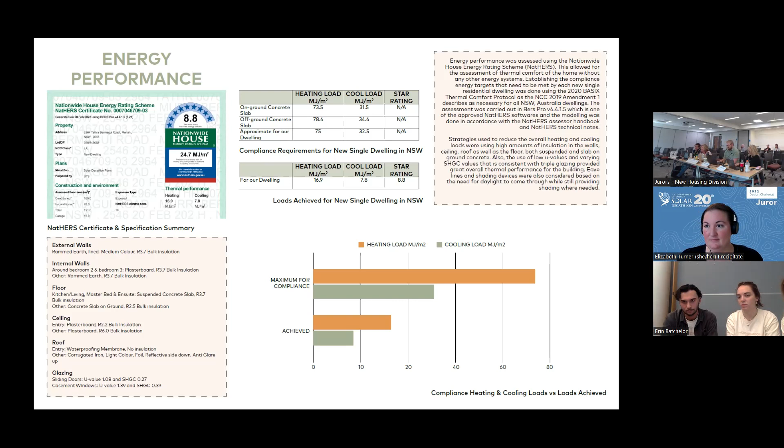That's a great one, thanks for sharing that. The one thing I'm not following is your financial economics on a $350,000 house for 30 years - if the payment's only $1,080, that's about less than a 1% interest rate. I'm sure interest rates in Australia aren't that low, are they?

No, but I think the location plays a role - this is a trend in Australia and on the East Coast where a lot of people are moving to these smaller communities outside the city because of significantly cheaper land cost. So that's a massive element of this, where you're not spending $1.5 million Australian dollars just to buy a small terrace house in the city. You can spend 200,000 and get a large plot of land.

Coupled onto that, the reduced need for energy plays a big role in cutting costs. This local material palette means everything is very accessible and can be delivered to the site cheaply. We also designed every element to the standardized proportions of large Australian manufacturing, so there's less wastage - you're not designing very specific details. This is all mass produced, easily accessible material.

I think the other thing that plays into reducing the cost of the project is that excavating would have been one of the more expensive things, but we used all of that excavated material as our insulation. So repurposing one of the highest cost elements as insulation, doubling up the functions of more expensive elements of the project.